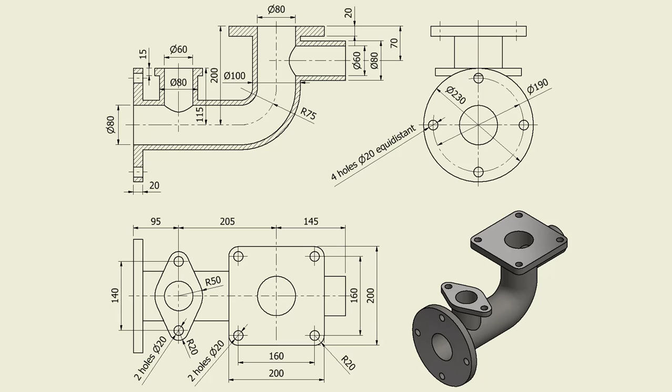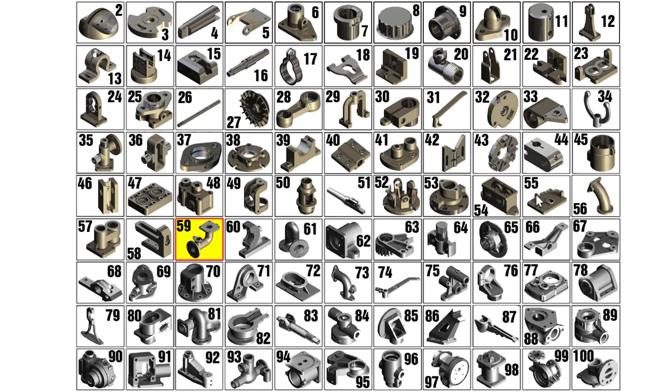Hi my friends, let's model the part number 59 pipe connector from my collection of 100 parts. The picture of this part is here and you can see 3 flanges for connecting with other pipes.

Looking at the drawing, we see a central pipe which we treat as a sweep volume, and the 3 flanges with another extension here.

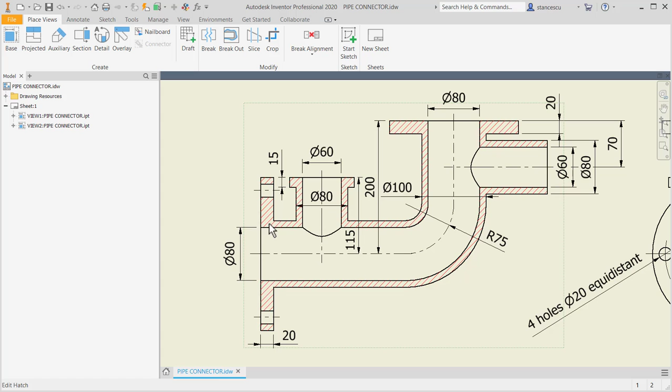We start by creating this line, and then we create 2 circles at the end to be swept on the line. The line is 95 plus 205, this distance, 200 here, and the radius of 75 between these 2 lines.

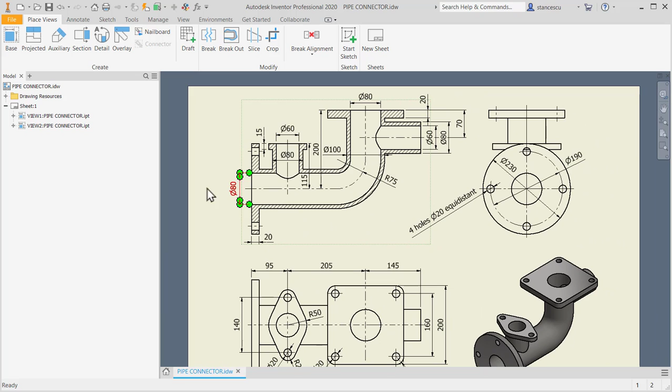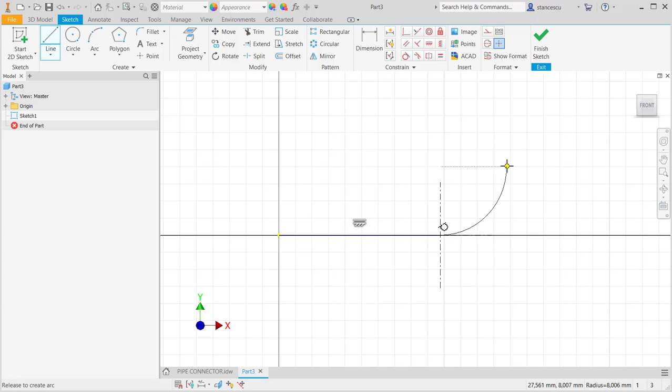Let's start with this. The plane is XY. Line, arc, 90 degrees, you see the horizontal, and the vertical shorter line.

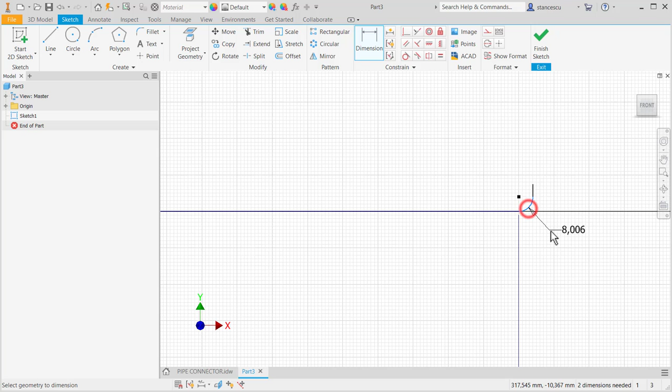As I said, dimensions are 95 plus 205, a radius of 75, and another line which is 70.

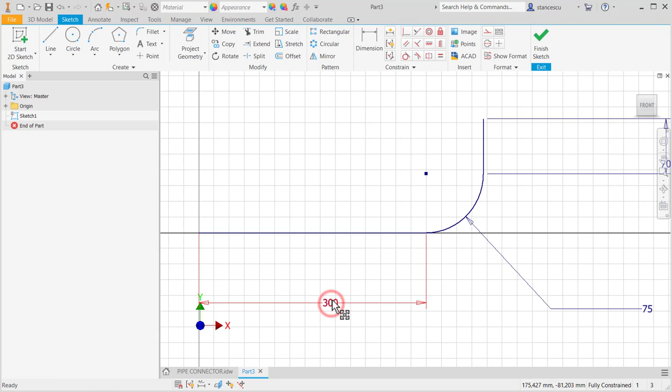This is the first sketch. Let's correct something here to be more legible. Good. Finished sketch.

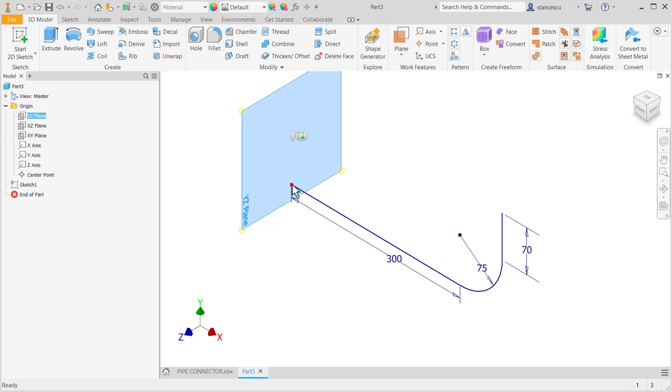Now in the work plane from the center point we draw a sketch with 2 circles, interior 80, exterior 100. You see this dimension, 80, 100. Okay, 80 and 100.

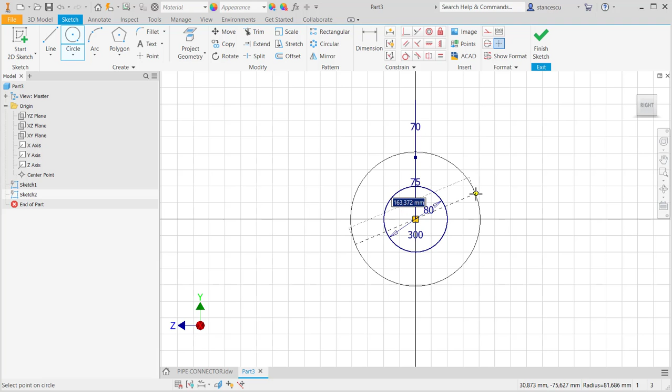Finished sketch. Now sweep this area on this curve. Okay. Yes, this is only to advertise, to advise about possibilities.

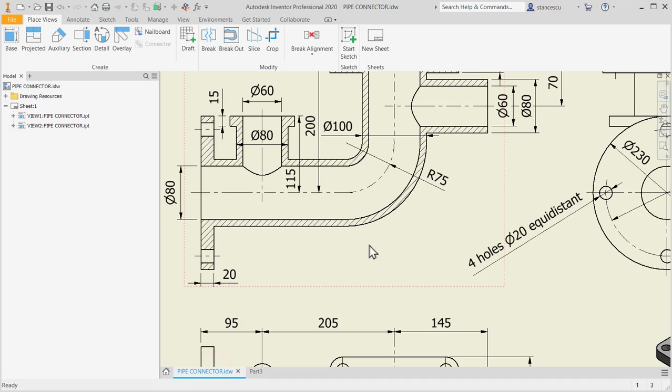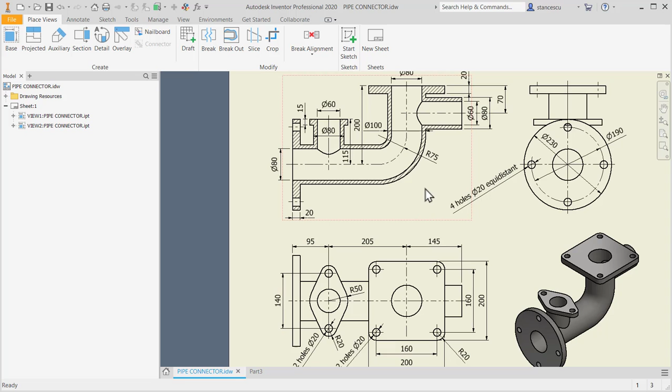Good. Continuation is with this construction to finish with the great things here. As you can see, 145 from this, or plus 200, 300 is here, to have this plane, and then we create a circle to extrude to the part.

Good. Plane from the same plane, and the distance is 95 plus 205 plus 145.

Okay, we work here with 60 and 80, two circles in this sketch, placed at a distance from this end of 70.

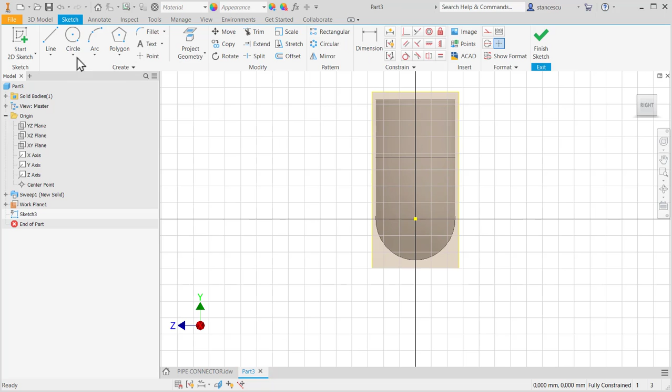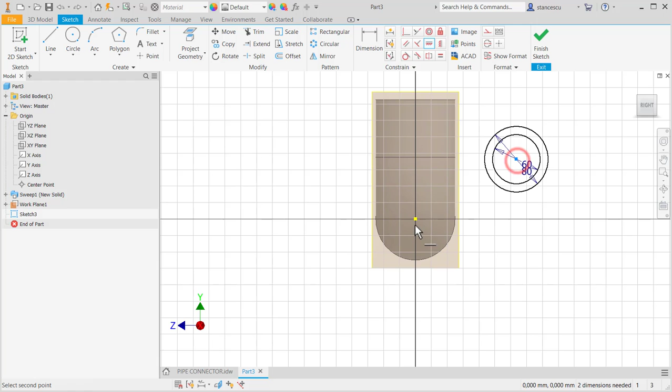Circle of 80, another circle of 60 on the same horizontal, because this is horizontal and this is vertical, with a center point and a distance of 70 from upper face.

70. Finish sketch. Extrude only the external, not this circular crown, but this. To next. Okay.

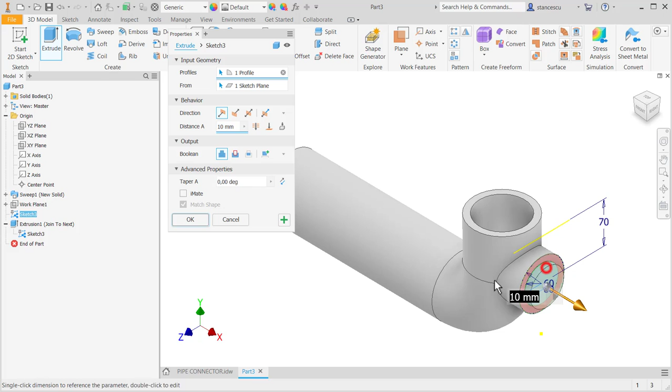Now another extrusion. I share this sketch, share sketch, and now I extrude the interior as cut to this interior. Yes? Okay.

This shared sketch is not necessary to be visible.

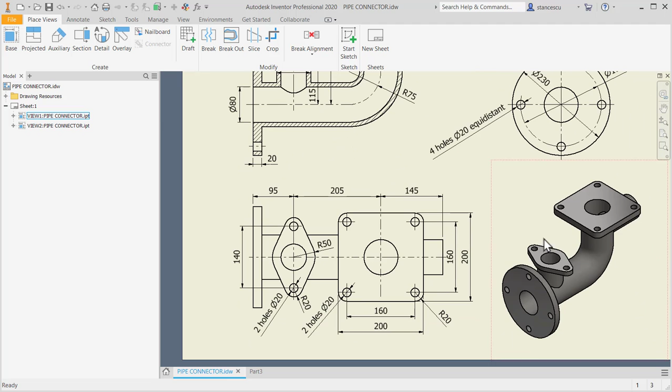Now I create another plane at a distance of 115 in order to create this flange and this pipe, short pipe, 115, and the flange is centered on 95.

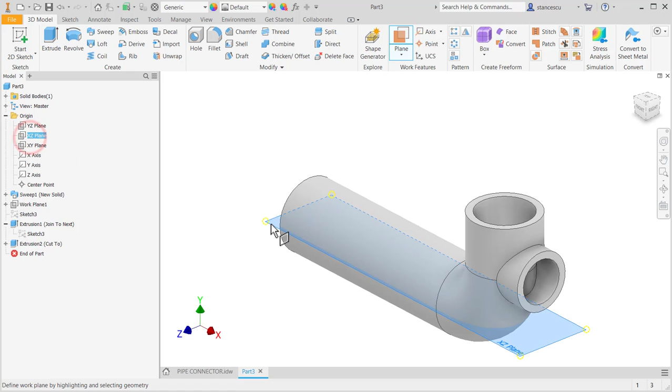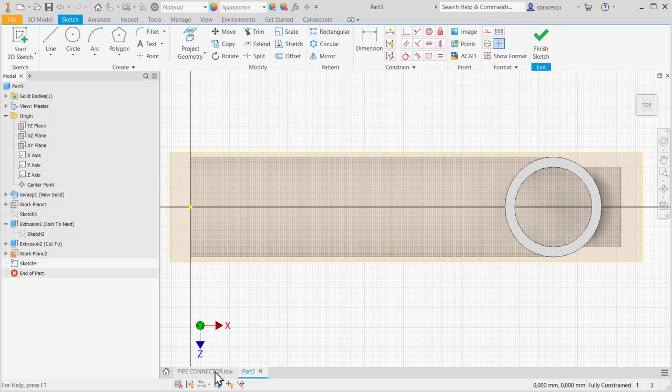Plane 115 up, sketch. Now this is horizontal to have no problem with orientation, and the sketch is placed at 95. But let's start with this contour.

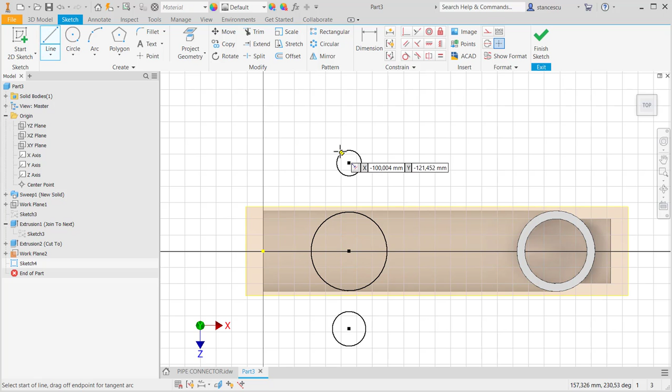Now I create circle, circle and circle. I place the first one at the same horizontal with the center point, the other on the same vertical, and on the same vertical with this one. Now I draw a tangent, keeping the left button pressed

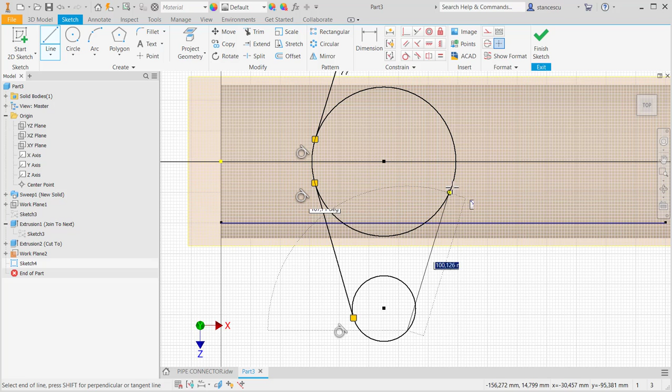till I catch the other. You see, now I didn't catch it. I go to tangent and I apply manually tangency here. The last line is, you have to keep pressed here and then to start.

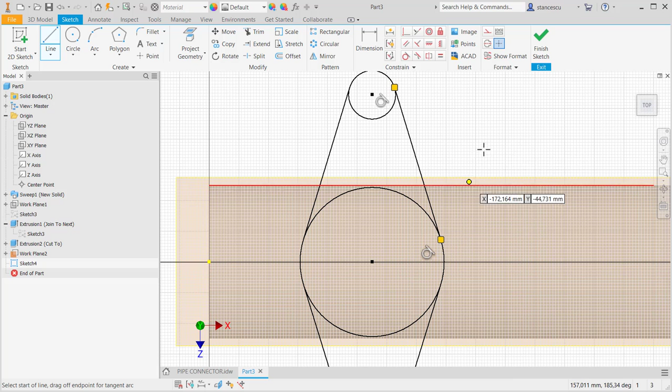Good. These two circles have the same diameter and these two must be equal. Now we have 4 dimensions needed, 3 for the contour and 1 for the distance to here. This is 95. We know already many things about this part.

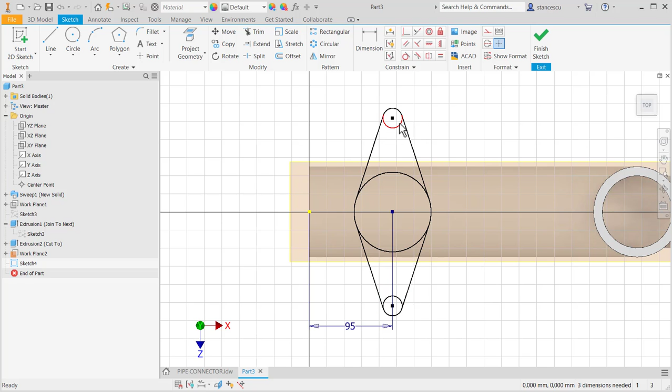Split this circle, this, here we need twice, and apply selection to this and this to be not visible. Now distances, you remember, but let's see again.

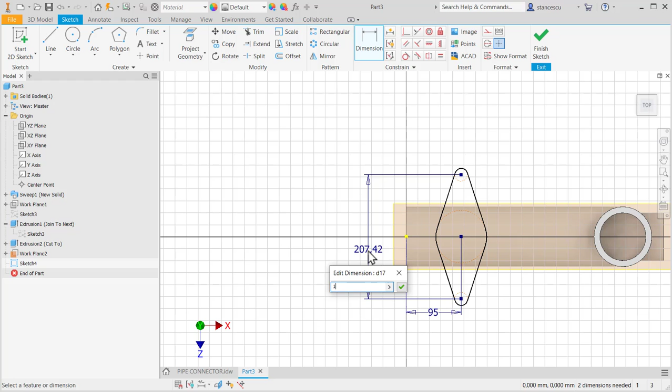140, radius 50, radius 20. 140, 50, and 20.

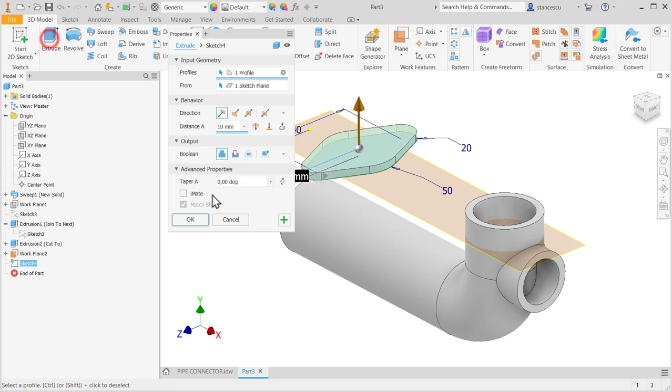Good, fully constrained. Finish sketch. Extrude, but the other direction of 15. Let's see. Yes, 15. You see? Good. 15. Okay.

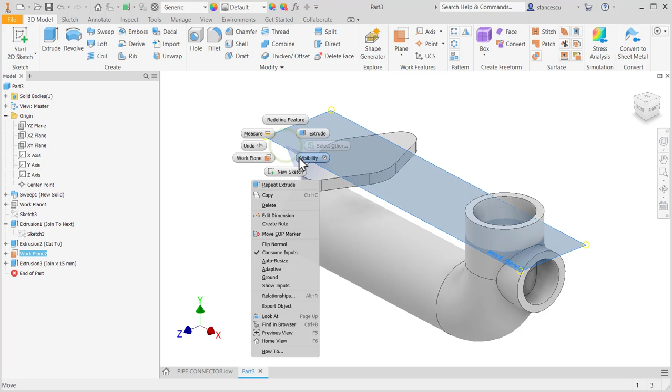Visibility. Now I create a circle on this face. The circle is diameter of 80 and interior of 60.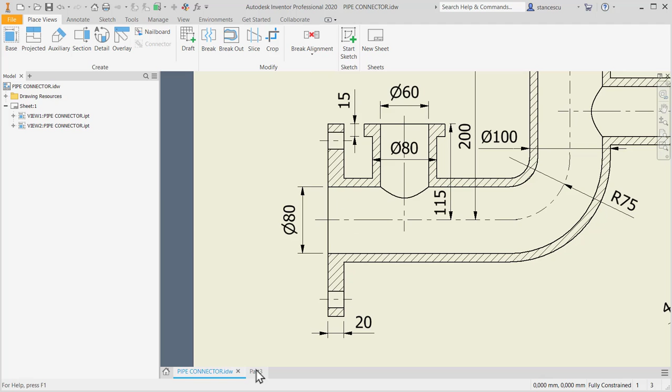Let's create both these circles, and we'll use them after. 80 and 60.

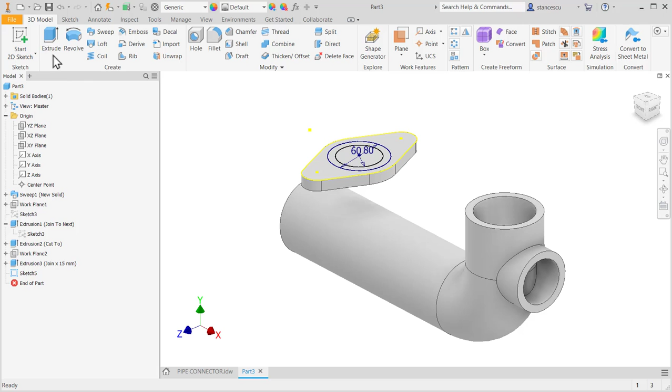Finish sketch. Now extrude. Extrude the external, yes, the other direction, join to the part.

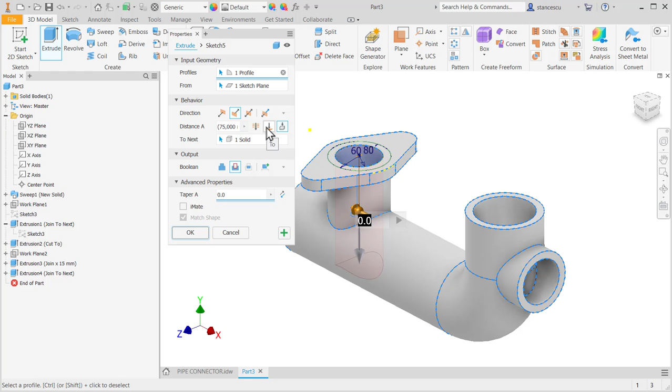Plus, this is the subtlety, and this one cut to one face. The face is this one, yes, and now we are sure that we create a hole there.

Okay, very nice, very effective. And you have to notice that I didn't use sharing the sketch like before, yes.

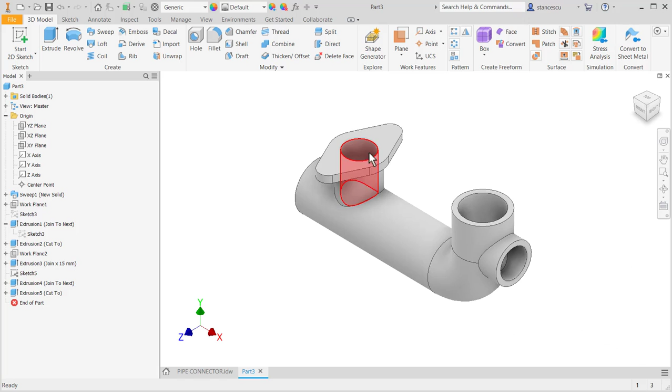Now we have to create a flange here and another one here. This is circular and this is square. Let's start with this square.

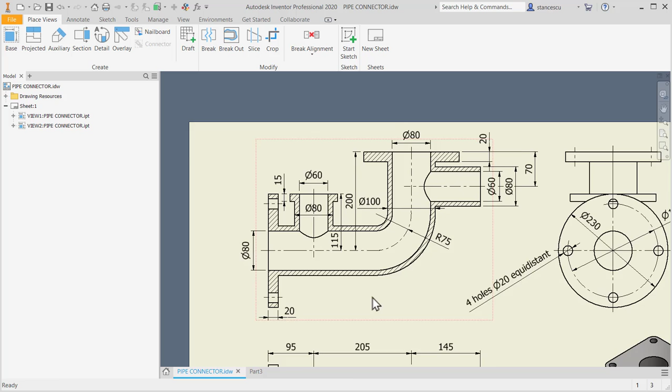It is 200, 200, and radius of 20 with a thickness of also 20. We create a sketch on this face.

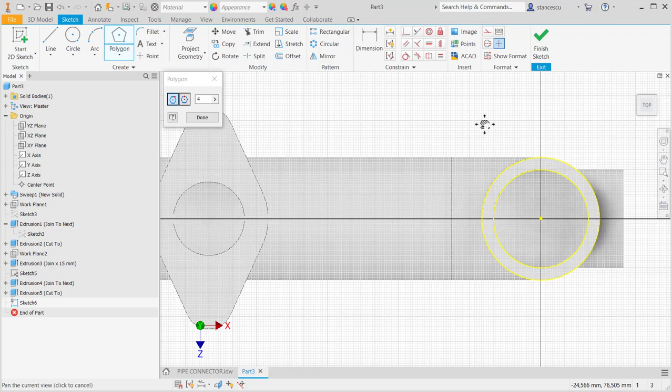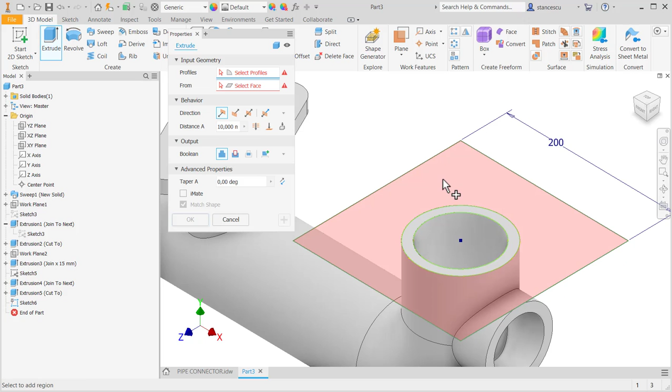Polygon, 4 sides, center, and no matter angle and distance, because we apply horizontal 200. Finish sketch, extrude this, only this, yes, the other direction on 20.

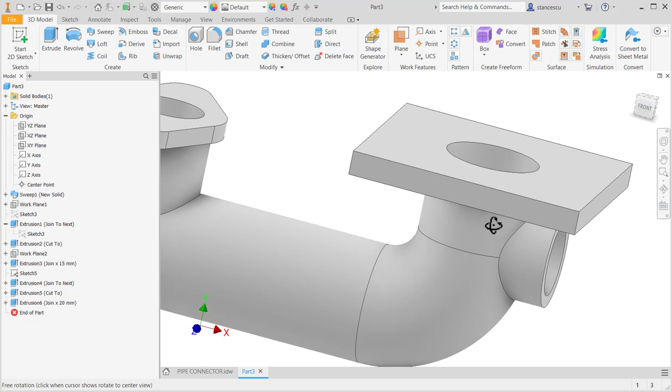Okay, the hole must be not disturbed, yes. I think this is too short, but we'll see. Now the fillet of 20, okay.

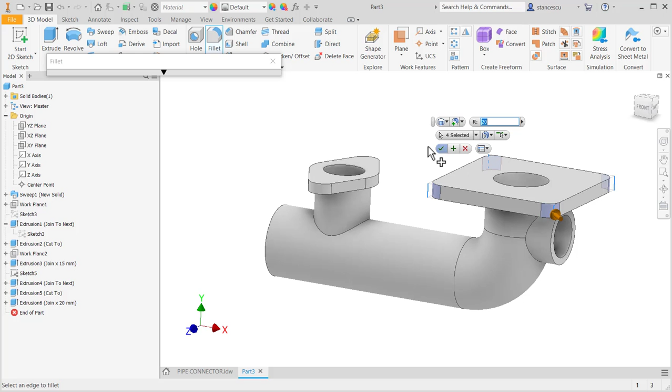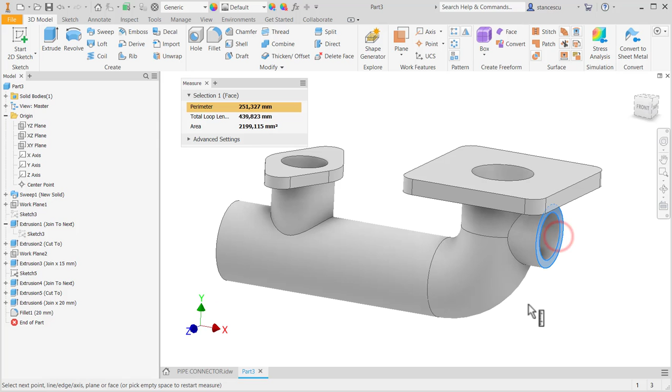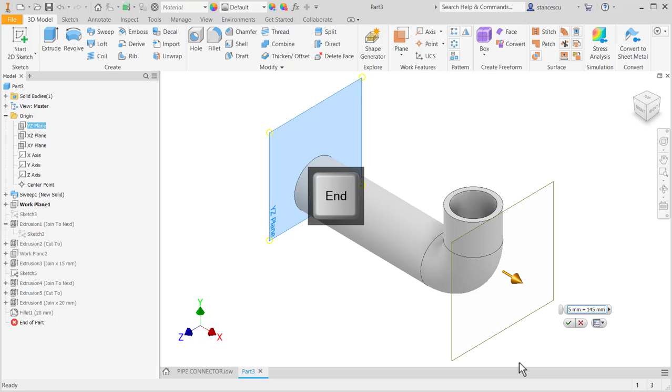Escape, F6. Let's see where is this created. Here is created, and the plane is, we have here 95, 205 and 145. Okay, then this is too long.

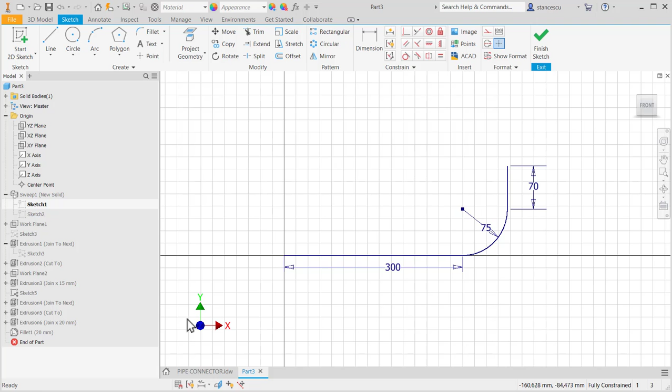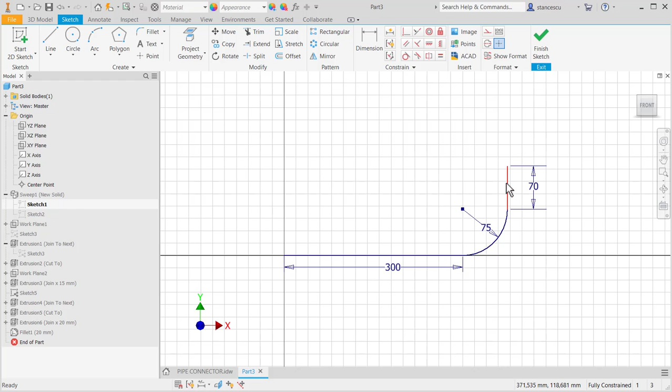Let's see what about this sketch. If you look here, you see that there is a distance 95 and 205, but it includes this radius, and I didn't include this. Yes, the distance is from here to here. So I erase this and I place another dimension here to be 95 plus 205, and this is shorter.

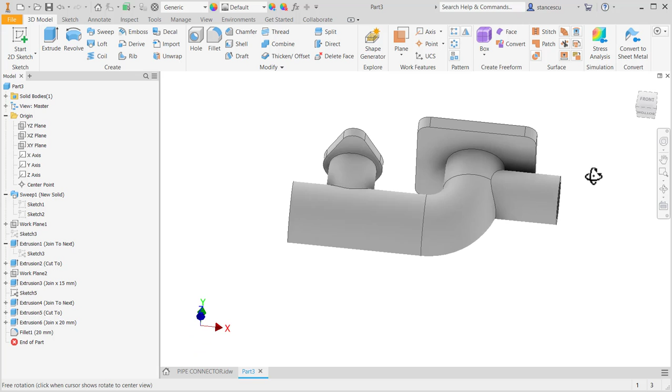Finish sketch. Nothing is disturbed. This is a parametrical software, and we can do any change anytime.

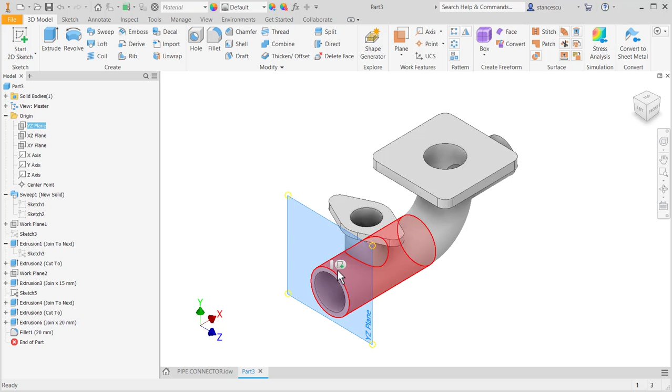In the plane, this plane, we create a sketch now for the circular flange, which is 230 in diameter and with a thickness of 20.

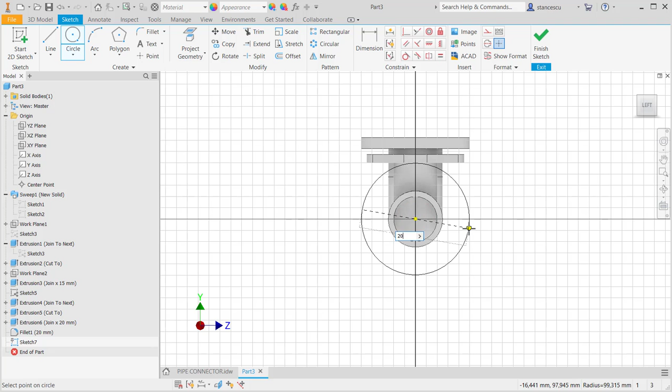Circle 190, project geometry, this, and extrude circular crown. Okay.

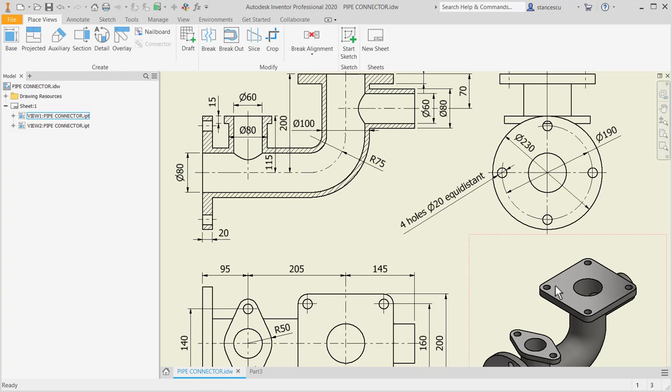Last are holes. 20, 20 and 20. All of them are 20 millimeters diameter. Good.

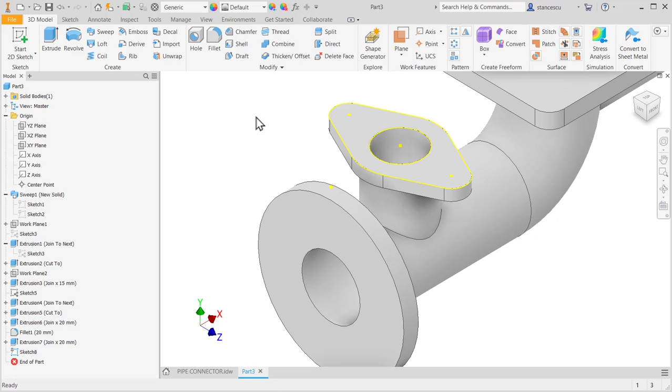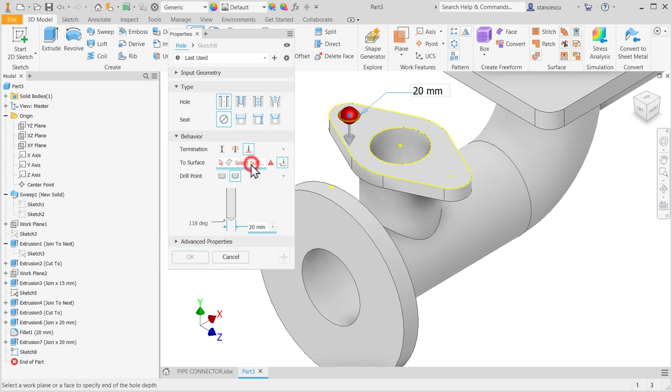Let's start with this one. Sketch, not sketch. Hole, diameter of 20 and To. Yes, I don't want to place a through hole, because if somebody will change the dimension of the flange, it is possible that the hole will drill the pipe, and we don't want this when somebody changes this distance between axes. This point, and I select this face, yes, and now the other point. They are 20 millimeters.

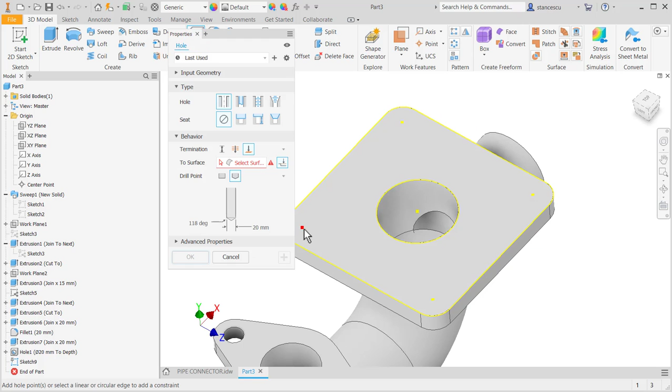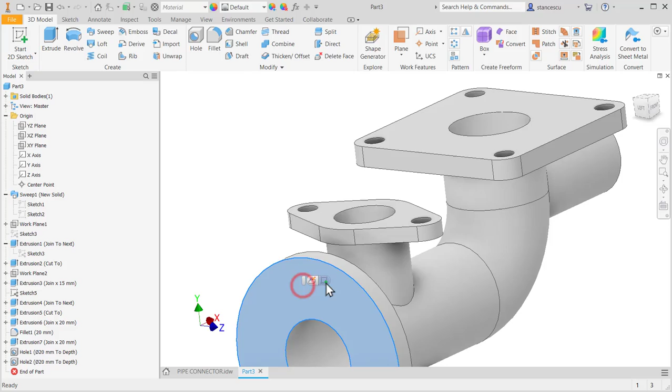Okay, another one. Sketch, no sketch. Hole, this position. Now I select this face for the same reason, and now all the other three to be 20 millimeters diameter. On this face I see a diameter of 190 and a hole here.

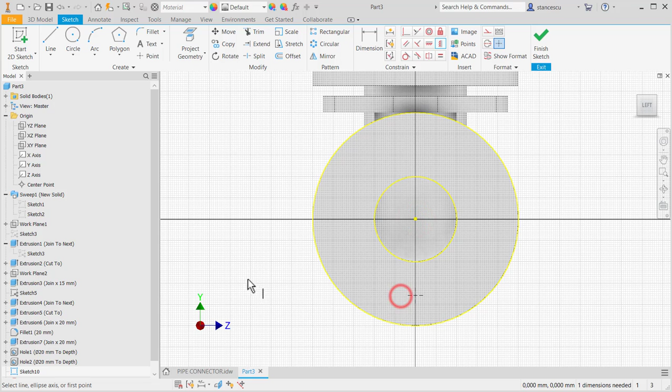I place a point on the same vertical with a center point or its projection, and the distance of 190 divided by 2. And this is too small distance. It means I made a mistake, of course.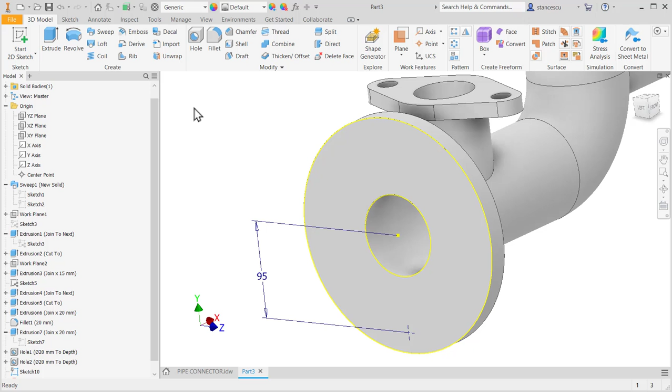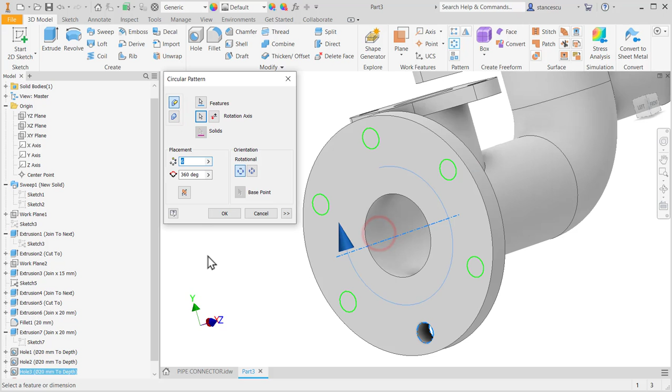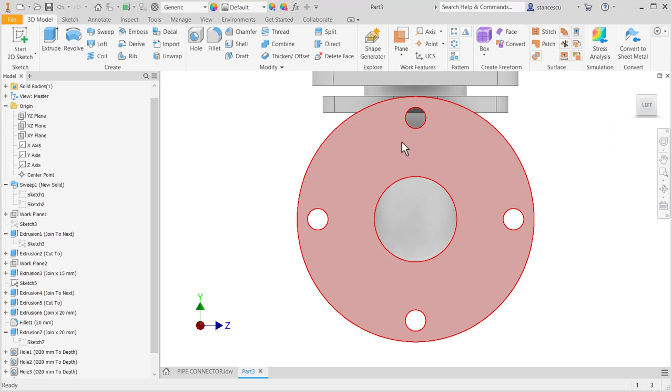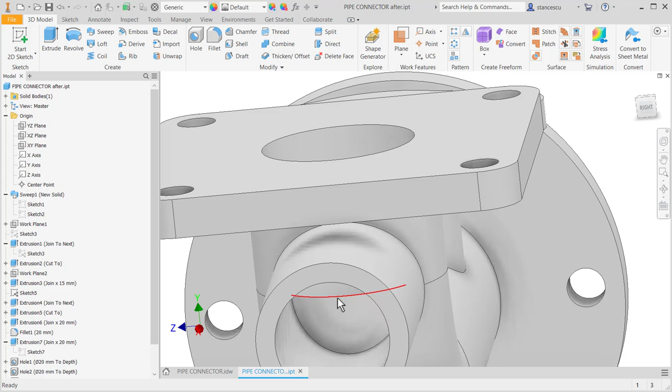Well, let's verify the object a little, because I see something here. What is this? Yes, there is. Oh, I know. This extrusion of cut is stopped here. This is not good.

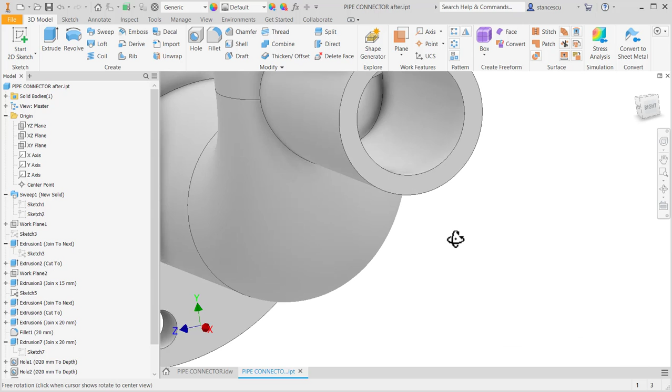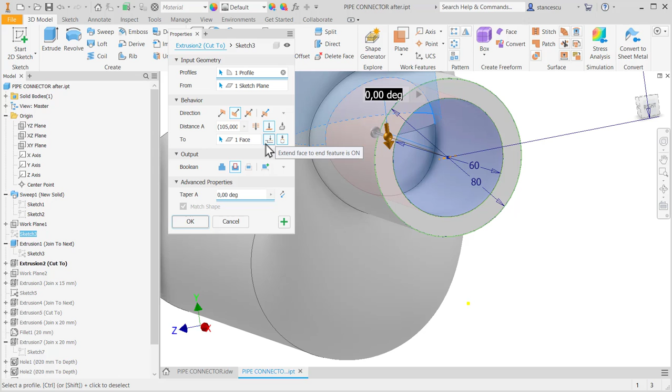Let's take a look of that extrusion, which is this, yes, double click, and let's apply extend, this extend, and that's okay. Yes, this was applied. Look here,

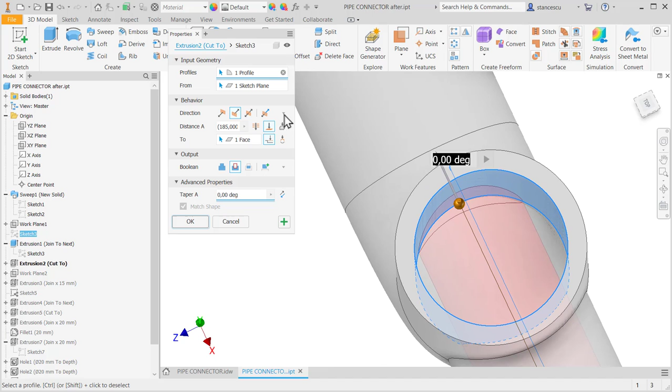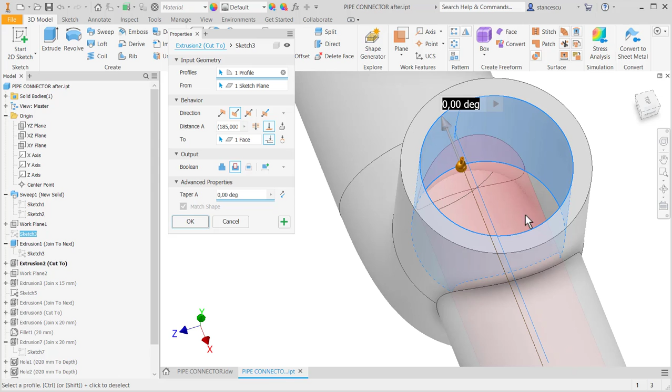minimum solution. The minimum cutting is applied, and this is not correct. When I disable this, the cut is getting over the face here. Now it's okay.

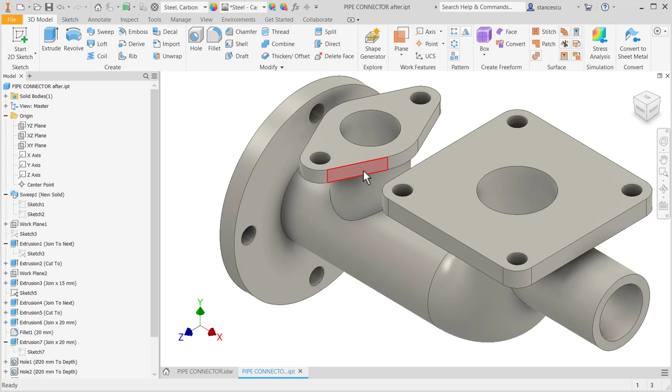Okay, I told you about mistakes, yes? Be careful. The material is steel carbon, the aspect is steel cast, yes, steel cast, and some faces are machined. Only these 3 are enough to be polished.

The data, 22 kilograms. That's all for today.